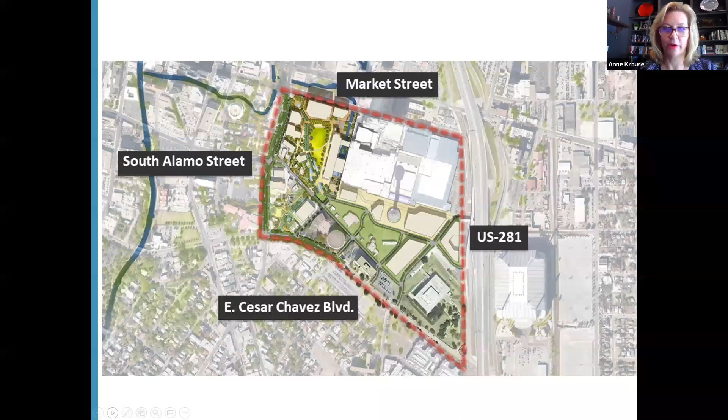So the 40-acre urban parks district that we're creating, called Hemisfair, tipping our hat to the '68 World's Fair theme, we are going to be creating 3 different parks that all have a different personality.

The first one I'm going to tell you about is Yanaguana Garden. The design theme for Yanaguana Garden is play from pre-K to gray, and we're doing a really good job of that. Since opening just about 5 years ago, we've had over 2.7 million visitors come to Yanaguana Garden. It's about a 6-acre footprint and 4 acres of green space, and people really do play there all the time. Of our annual visitors, 84% are locals, of every age, ability level, and zip code. So all of San Antonio is represented, as well as other counties and states, and we lost track of how many foreign countries our visitors have come from. It's truly an international spot, but the best part is it's for us locals.

These are just a couple pictures so you can see people having fun. The park is open 365 days a year from 5 a.m. until midnight to discourage camping, and it's a pretty lively and vibrant spot.

We have a series of public-private partnerships going in, and these are on developable parcels. So this is not on the parkland, but these parcels are adjacent to the park, and they're part of our long-term self-sustainability plan.

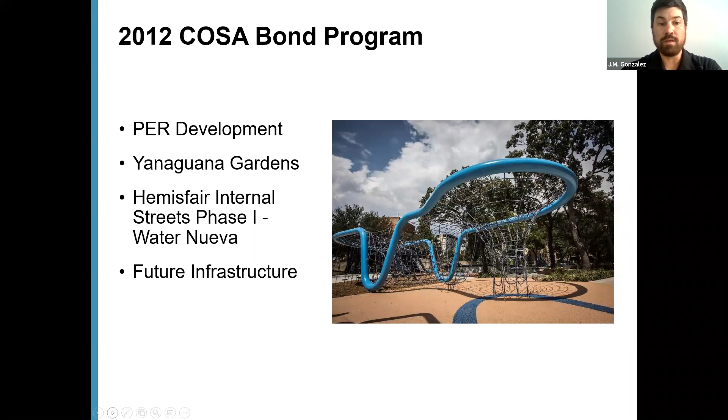When we started looking at the PER, the first thing we looked at was that Hemisfair is right in the heart of the urban center of downtown San Antonio. When we looked a little closer, we saw minimal connectivity between the businesses and the streets out there, so it was apparent that we needed to establish a street grid. That's the first thing we identified as an objective.

We moved on to looking at constraints. If we're going to put in a street grid, we need to make sure it works with the constraints out there. Hemisfair has been around a long time, and there are a lot of stakeholders that have come in, as well as utilities and drainage constraints that needed to be accommodated for.

We then looked at existing and future infrastructure. There's a lot of drainage and a lot of utilities. If we're planning for developments in the future, we want to make sure whatever exists could accommodate it or would have to be improved.

And finally, phasing things out. This was part of the 2012 bond program, and we're now in the second bond, 2017, with another project happening as a result. But it has to be phased, and it's not just about finances—it's also about the constraints and making sure things work in order. Next slide.

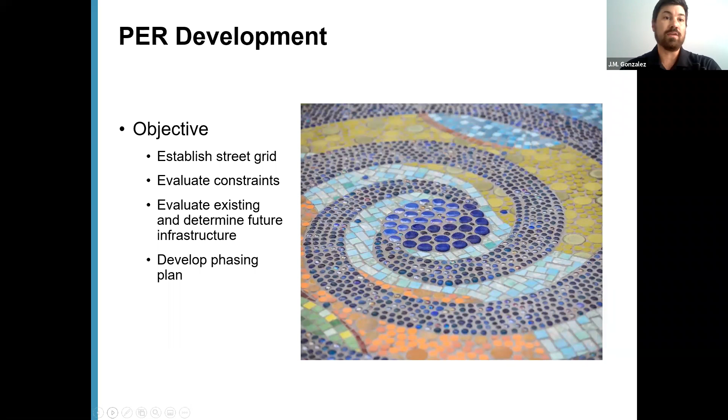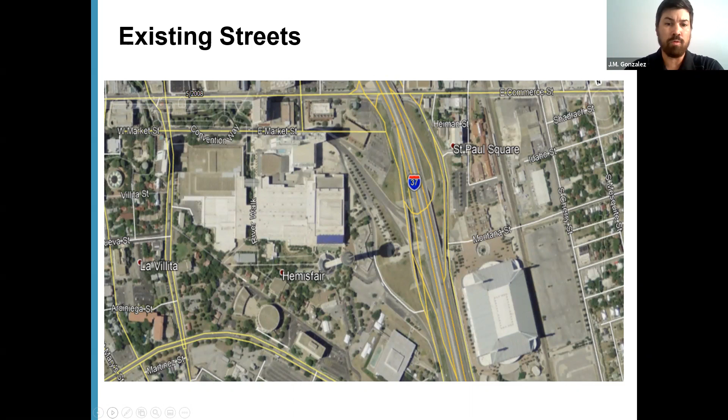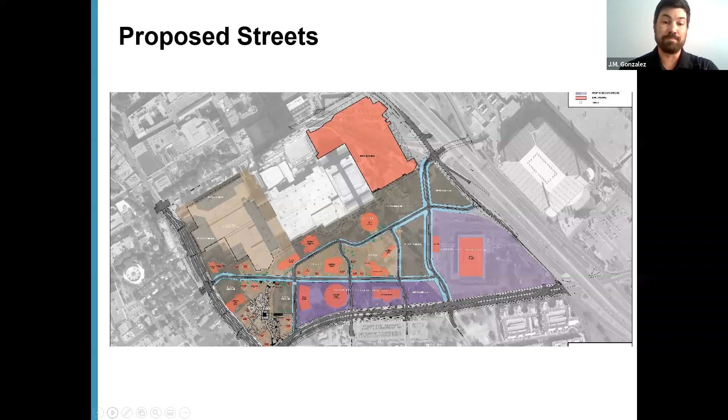So as I mentioned, constraints. Once we put this street grid down, we had to look at a couple of different items that popped up. One was environmental. There were a lot of really old trees, heritage trees, 100-year-old oak trees in place that we didn't want to impact.

So we took the opportunity to realign streets to avoid that. There's actually a really cool slide that Anne will show later where some of those trees were relocated as part of our street project.

As far as the right-of-way, there's a lot of constraints as well. In orange is the Institute of Texan Cultures, operated by the University of Texas. In purple is the federal courthouse and federal property. In green, the northwest side is Civic Park, southwest is Yanaguana Garden area, and in the middle is Tower Park. So all these right-of-way constraints had to be adhered to when laying out the street grid.

From a historic standpoint, there were historic homes brought on site that were being restored. A lot of them are now places of business—I think there's a yoga studio, a couple of little restaurants, pubs, really cool, some offices. But they were still historic homes, and we had to make sure we preserved them and didn't impact them in any way.

Additionally, there was an acequia that ran through the park we had to be aware of. We knew it was there from old maps but didn't know exactly where it was located, so we had to be really careful not to impact it. We actually found it on the first project and had to do mitigation measures for it.

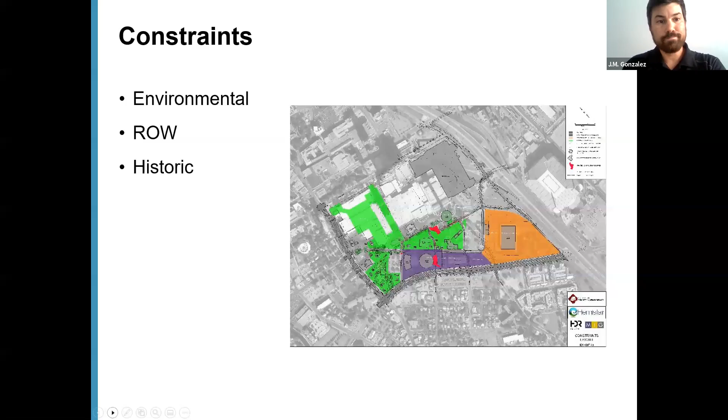Next slide. So this shows the completed street project.

In fact, when we did the engineering for the streets, we used special structural soil that allowed the road to be built while preserving the roots and allowing them to still take in water without being impacted by the pavement.

So again, looking at the infrastructure, what was existing? There were tons of utilities and drainage infrastructure in place, but were they suitable for future development, as well as geotechnical constraints?

So we looked at it from a utility standpoint—you can kind of see the network and grid of utilities out there. It's a spaghetti bowl, they're all over the place.

As far as drainage goes, there was a lot of localized flooding we had to plan for. We're going to build developments, and the last thing we want is for them to be standing in water, so we planned out some drainage improvements.

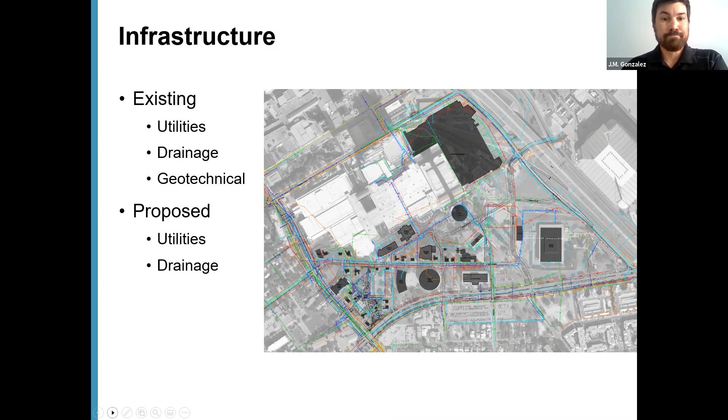They could be anywhere from 3 feet wide to, I think, a 6-foot sanitary sewer line—it's huge. So you want to make sure these things stay in place, we plan around them, and they're adequate to provide services for anything that's going to be developed.

With that said, a lot of these are active lines, so we want to make sure they remained in service until the new lines were brought on board.

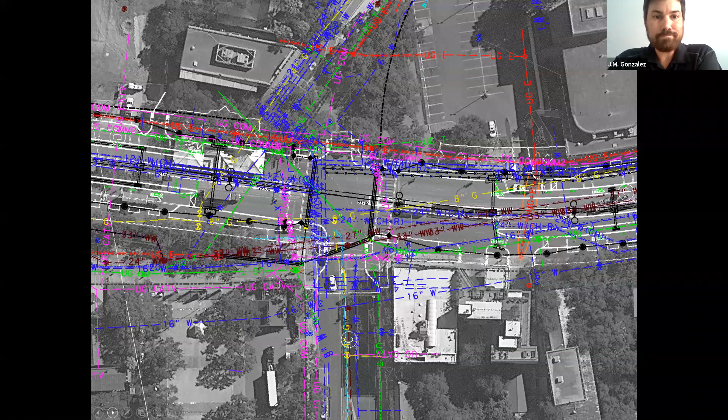As we're building our drainage network, we want to build from the downstream, so that got taken into consideration.

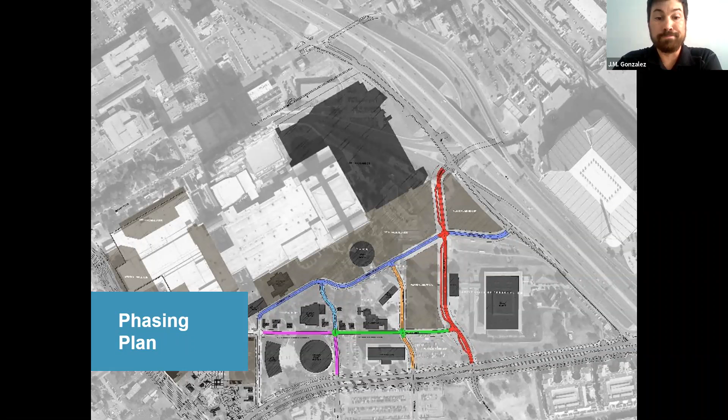So again, Yanaguana Gardens, as Ann mentioned, is a destination location for people of all abilities and all ages. It was a privilege as a transportation engineer—most of my projects are boring, flat roads—to be involved in a project like this. That was a true destination location. It's world-class, it's ever-evolving, and my favorite part, it's interactive. It truly sets the tone for the entire park itself.

And this is the Water & Nueva project. Again, this is the first street project that came out of the PER. I'm kind of kicking myself because I didn't include that in the map as to where the scope of the project was for this, but essentially it is the southwest portion of the project, connected from Alamo Street to the east and to the south over to Chavez.

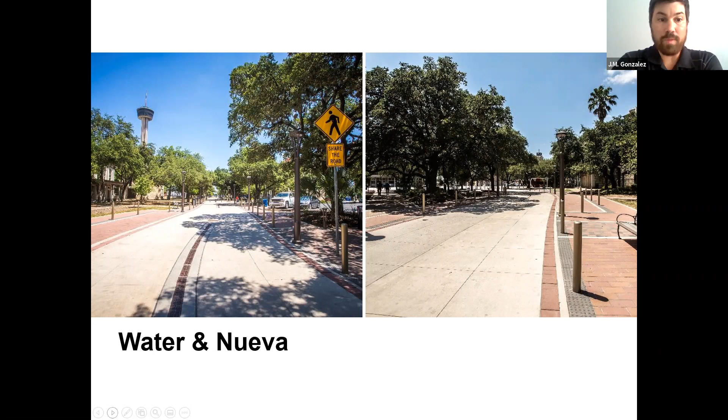But 100% ADA accessible in every single direction. It's low speed, I believe 5 miles an hour. I don't think you have much traffic out there right now. Even before, we have bollards, so they're able to shut down these roads for any types of festival. In fact, when I was going through pictures, one of the pictures I had was from one of the tricentennial events, and they have all these vendors out there. This beautiful site is able to accommodate all the activities that Hemisfair puts in place.

And so what's coming up? Future infrastructure. Right now we are looking at, as part of the 2017 bond program, Hemisfair Phase 2. It's Hemisfair Boulevard, shown there in blue, and this will allow the connectivity from Water Street, which goes south, to IH-37, and will allow that east-west movement across Hemisfair Park. I guess, Ann, if you want to take it from here and tell us what we have more to see in the future for Hemisfair.

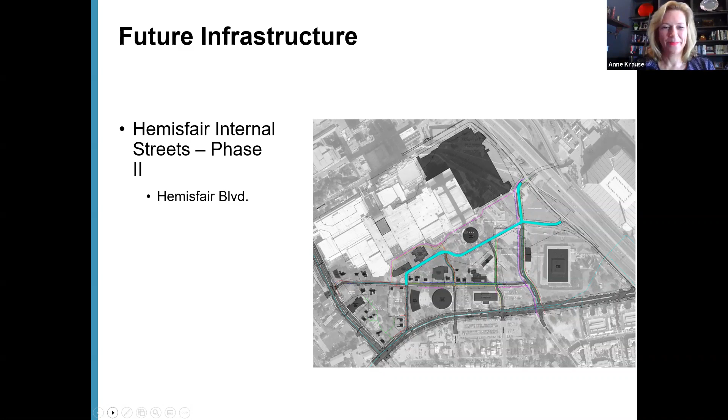Great, thanks JM. So let's look at this map again. So you know about Yanaguana Garden. The next one will be the Civic Park. That will be the flagship park of San Antonio. The parkland alone of Civic Park will be 9 acres. And if the stars align, we hope to begin construction next summer and then open it to the public the following year.

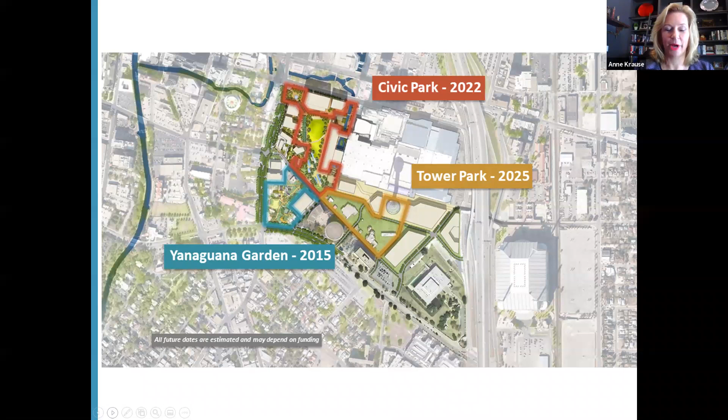So JM mentioned that the western wing of the convention center was deconstructed. That's what was left behind. You can see the famous Hilton Palacio del Rio that was built for the fair, but that is the plot and the site where the Civic Park will be built.

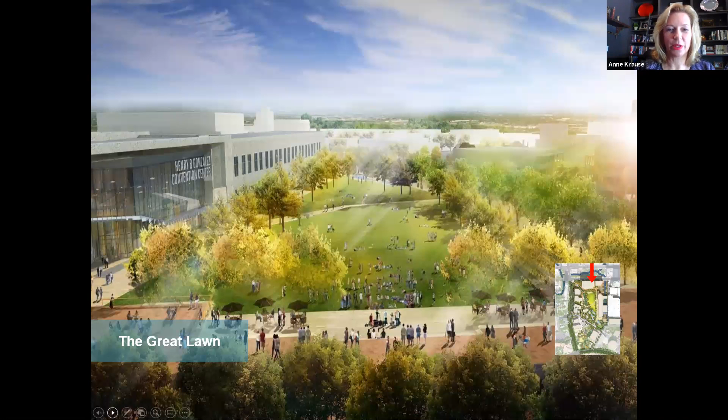Now the next slide will show you what the vision is for that space. This is as if you were at Market Street looking south down toward Yanaguana Garden. Part of the 9 acres will be a 2-acre lawn that can hold 10 to 15,000 people if the Pope comes to visit, or if people want to protest safely, or if Mick Jagger wants to come and give a concert. We have a place to gather.

And that's something that the designers, GGN, found out when they came to do interviews in San Antonio to see what the community wanted. We like to get together, we like to party. COVID's kind of tamping that down for right now, but eventually we'd like to get back to doing that. Think about our fiesta events, we like to gather. And so we're finally going to have a gathering spot. Imagine when the Spurs win their next championship, we'll have somewhere to go.

And then the third park will be Tower Park, and that will be at the base of the iconic structure you see on our skyline that was built for the World's Fair. We've already begun design work on that, and we hope to open it to the public in 2025.

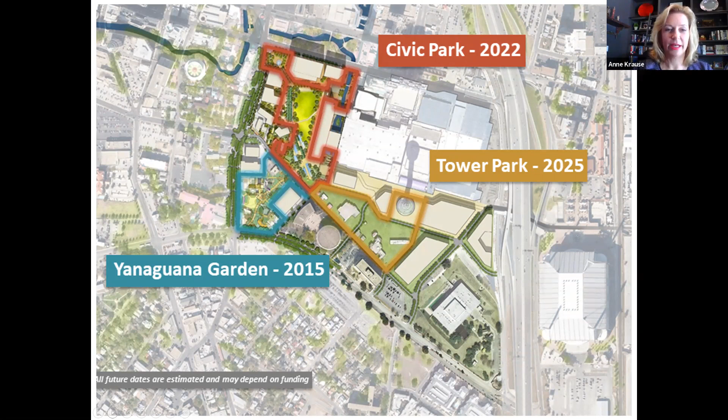So as I mentioned, we get community input when we're doing design. And it's really fun to have different groups that represent all types of San Antonians get together and express what they want to see at their park. That has been a very successful endeavor for us because this is truly a park for the people of San Antonio by the people of San Antonio. It's great to see and hear what they want, what kind of services they want, what kind of businesses they want, the complete streets where pedestrians, cyclists, and cars driving slowly can all share the road. That all comes about because the community says what they want at their park, and we're so pleased we're able to deliver that.

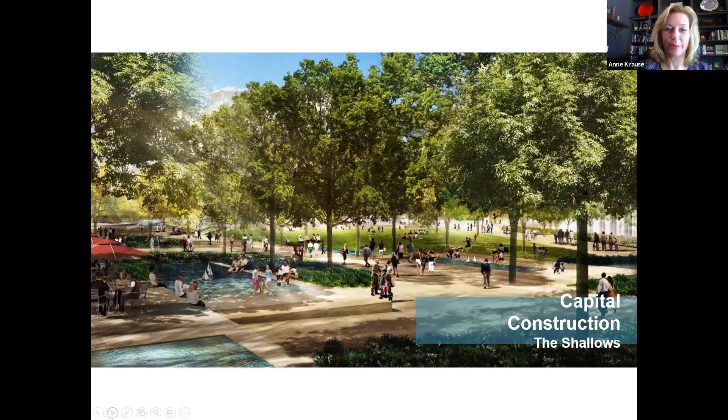The Conservancy raises funds for basically four things, because one of the misnomers out there is that the city pays for everything. While the city has provided generous bond funding, that is not enough to execute a world-class vision, so that's where philanthropy comes in. We raise funds for capital construction.

Next, historic preservation. We have 21 historic structures. Some were built for the fair, but this one was a house built in the 1800s, and someone was actually living there on East Nueva Street. It was called Goliad Road at the time, but they had to leave their home for eminent domain for the fair. During the fair, that house was used as a restaurant. After the fair doors closed, there was no plan, so it fell into decades of neglect. I'm not kidding when I tell you there were squatters and feral cat colonies living there when I came to the team six years ago. As you can see, we've done some exterior stabilization work.

Now we're going to do the interior, and then we'll be able to open a business. They give us a portion of their revenues as their lease payment, which we then reinvest in the park. So it's a really cool virtuous cycle.

Next, as JM mentioned, we have a lot of environmental initiatives at the park. We do pollinator gardens and plant trees, but we also have transplanted trees. This one weighed over 110,000 pounds, and it was truly a feat of philanthropy and engineering. We transplanted 31 huge trees to their future site at Hemisfair, and of the 31, 29 are thriving, which is a really excellent percentage. We're really proud of that. The day Civic Park opens to the public, there will already be shade.

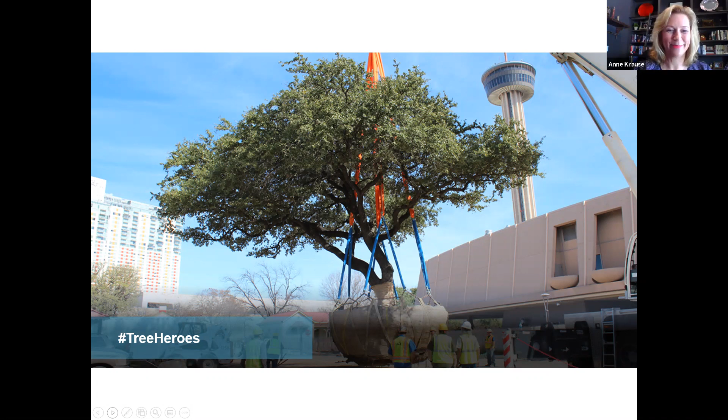Next, the last thing we raise funds for is programming. There's always something going on at the park. Due to COVID, we've had to pivot and do a lot of our programming virtually, but we look forward to the day when we can do in-park programming again. One outcome of the pandemic is that we realized there's a thirst for virtual programming, so we intend to keep that up even once the public health crisis subsides.

I would not be doing my job if I didn't tell you that every contribution makes a huge difference. We have a donor panel wall for people who give one dollar all the way up to millions of dollars, and it's in alphabetical order. We do that because we want San Antonio to know it takes broad community participation to pull off an aspirational vision like Hemisfair's, and everybody's gift matters.

Next, I invite you to come to Hemisfair. My favorite thing to do is get out of my office and into the park and hear children laugh. So consider yourself invited. Give me a shout if you want a personal tour, it would be my pleasure. Thank you so much.

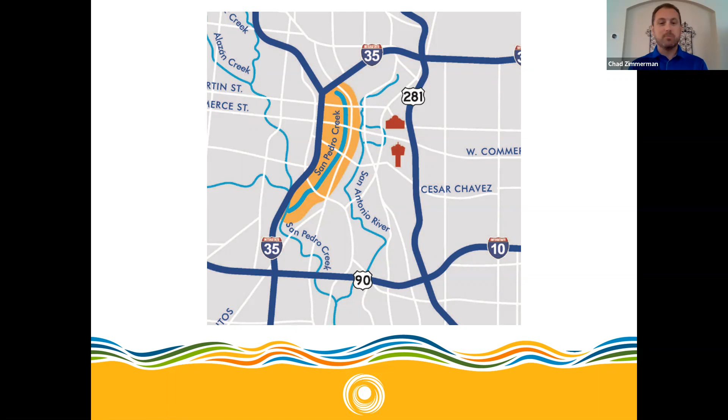So next, there you go. The project phasing of this project was originally programmed to be one continuous project, starting at Santa Rosa Street and going all the way down to Confluence Park, which is at I-35 and Cevallos. But it was broken up, mainly due to the Tricentennial San Antonio.

For those familiar, the 2018 Tricentennial celebration of 300 years of San Antonio. So it was broken up into phase 1.1, 1.2, 1.3, phase 2, phase 3, and phase 4. And also for constructability reasons, it was done this way.

So phase 1.1 goes from Santa Rosa Street, the inlet structure there at I-35. Most of you don't know what the inlet structure is, but we'll get there. And it goes down to Houston Street.

The next phase, 1.2, which is under construction right now, goes from Houston Street to Nueva Street. And then 1.3, which is in design and actually just starting construction, goes from Nueva to Cesar Chavez.

At Cesar Chavez, the creek goes underground into box culverts, then reemerges at the outlet structure, which is at El Paso Street, which is phase 2, and stays above ground all the way to I-35.

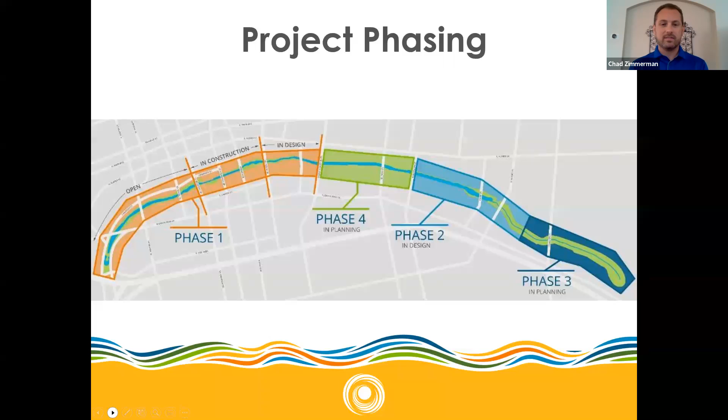So I'll hand it over to Christine right now to explain the other parts of the project and the phases of the project. So, Christine?

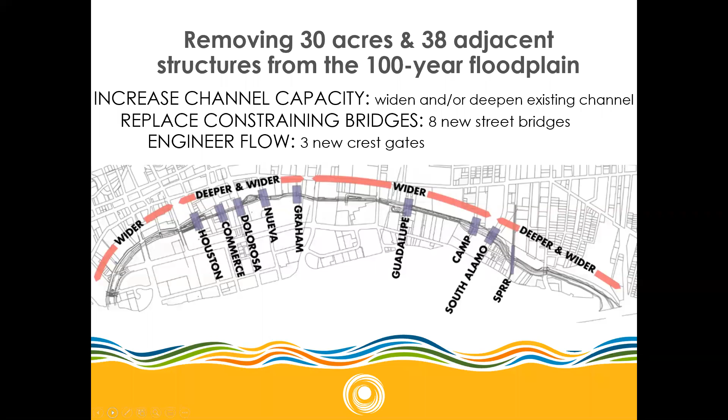Here you can see what the floodplain will look like once all phases of construction are complete. As I mentioned, the ultimate goal is to contain all 100-year flows within the bank. There was also freeboard added so that future flood control projects could bring flows to San Pedro Creek.

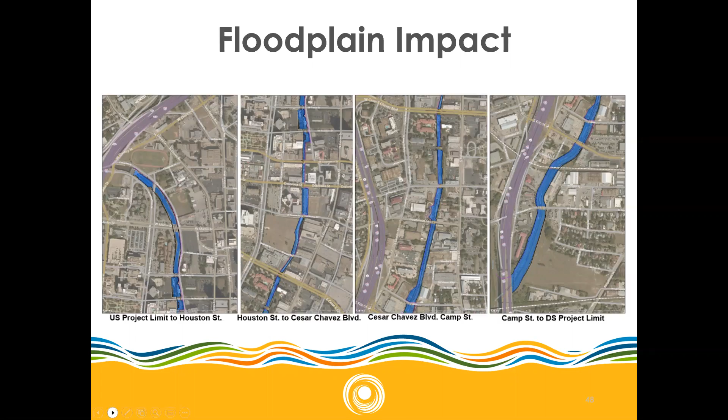Water quality is also a very important component of this project, so we took every opportunity we could to incorporate various features. In the open parts, we have aquatic plantings that remove nutrients from the water, floating islands, and plants behind walls. We also have engineered structures that look almost like manholes with filters inside. They intercept the storm sewers in the streets and flush out large debris before it enters the creek.

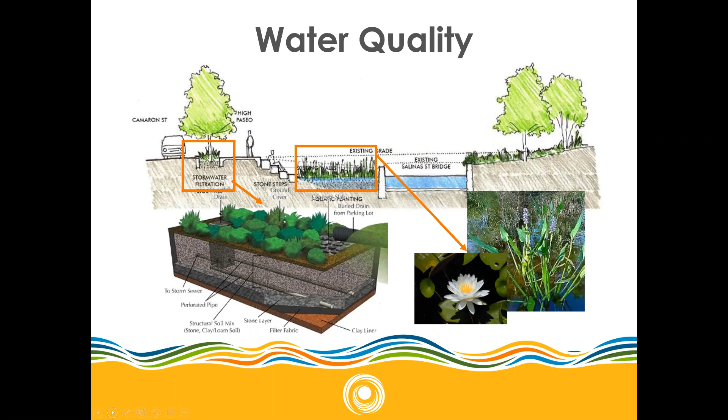In the next phases that will be opening up, we're incorporating new features such as bioretention ponds and bioretention soils. We're taking every opportunity we can to clean the water as much as possible, hoping to revitalize the aquatic environment so we can see more ducks, fish, and turtles, which is pretty cool to see when you go out there.

Culture is another key component. There's such a rich history from San Antonio, even in its 300 years since inception, and San Pedro Creek has played a crucial role in that. Some of the ways we tell this story is through the interpretive signage located throughout the park. You can see them all along the creek in the open part, and we'll continue it in the phases as they open up. They really tell how San Pedro played a role in the history of San Antonio and Bexar County.

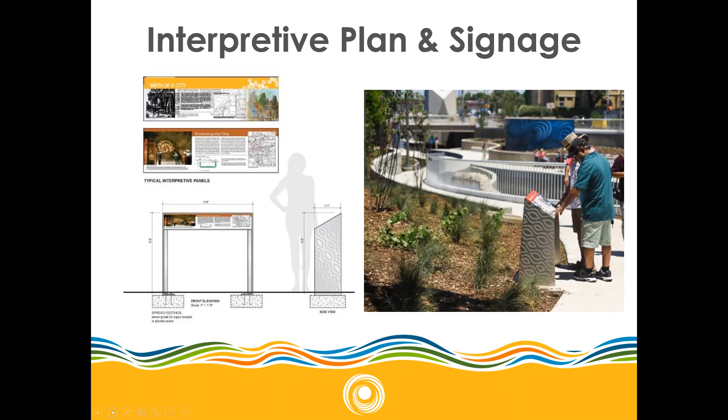Art is another important way we tried to tell the history of San Pedro Creek. We have various media throughout the park, from custom tile artwork to murals, bridge inserts, and word art.

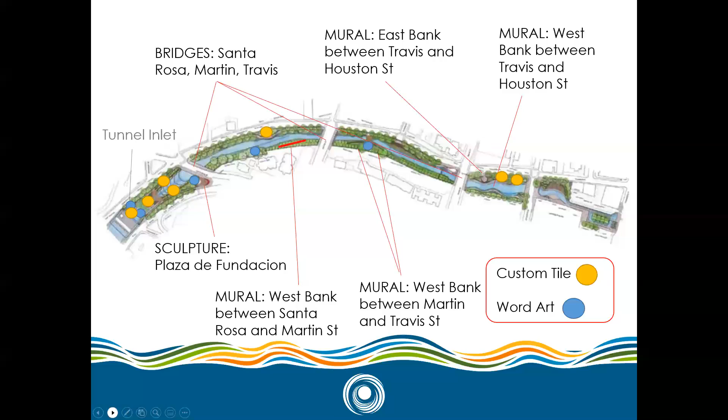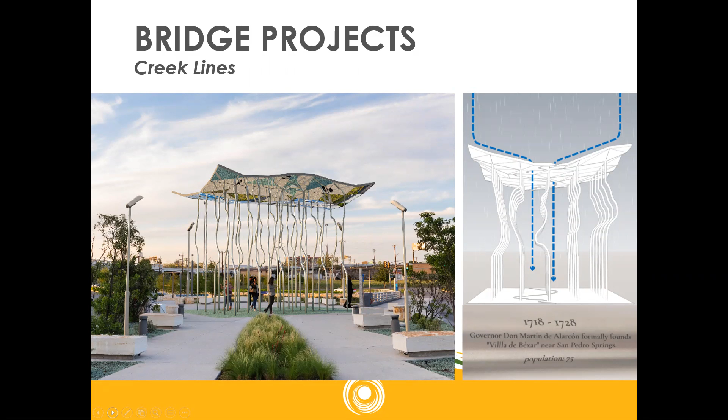Here's one of our art pieces found up at the Plaza de Fundación, just north of Santa Rosa Street. It basically tries to signify the history of San Pedro. There'll be historic text inscribed on the poles, and when the light hits it just right, it'll cast a shadow on the ground that looks like San Pedro Creek as it was naturally.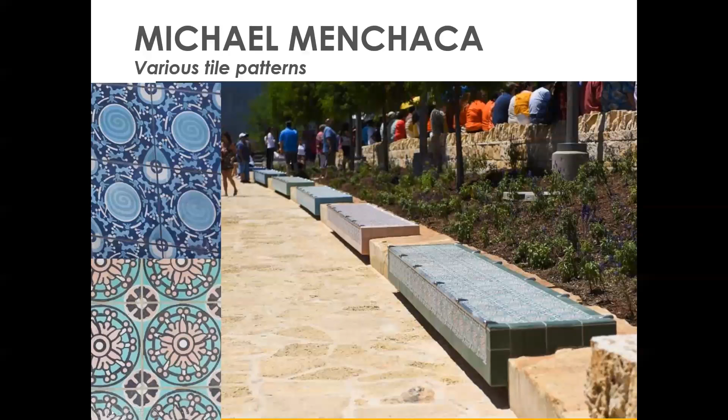Another artist we brought on board did a lot of the custom tile work shown here in the picture, the 12 generation benches. They're supposed to signify the 12 generations that have come and gone throughout the 300-year history of San Antonio. You also see a lot of his tile art throughout the open segment of the park.

We also have word art done by John Philip Santos. He uses various poetic and historical texts to again tell the history and really engage and inform the public of everything that has gone along San Pedro Creek.

In the current segment of San Pedro Creek that is nearing completion, phase 1.2 will have an interactive water wall, which is a feat in and of itself to make happen. It's a little over 250-foot long water wall, which is supposed to be interactive. It's really all about engaging the community. Much like we heard from Hemisfair with the chimes and the drums, it's really important to make this a fun space for the community, so we wanted to engage them through this interactive water wall.

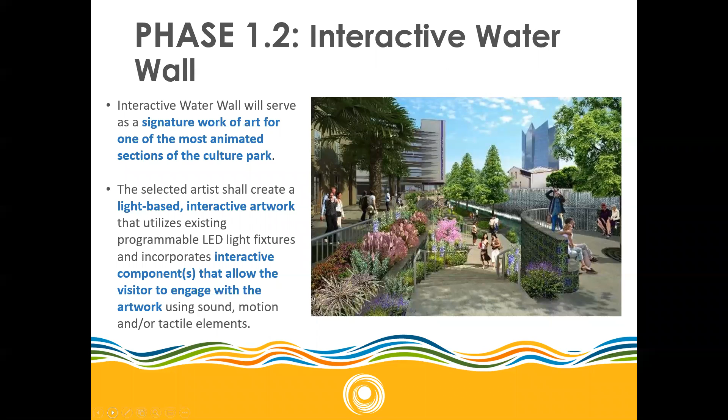We brought on an artist, Adam Frank, to help design the artistic elements of this feature. There's going to be a 50s-style microphone sculpture in the park, and across from it, along the water wall, there'll be LED lights. The public can come up to the microphone, talk, sing, or play music, and as the microphone picks up the sound, the LED lights and the water wall behind will change and move in accordance with the sound. So you'll see in real time how your sound is changing the wall, which is pretty cool. We've had some trial runs, and it looks really great. We're excited about that.

Also in the stretch between Commerce and Dolorosa, we're going to have even more murals. This will be a set of 5 murals meant to tell the civil history of San Antonio, from the Presidio and the Spanish Governor's Palace to the Alamo and all the rich history of San Antonio. We're in the process right now of designing those.

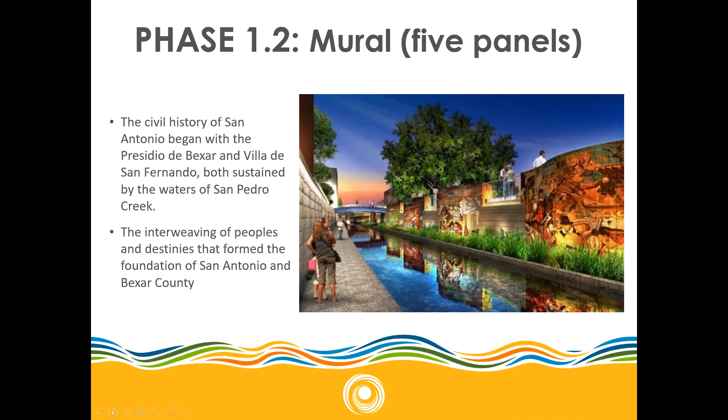Here I'll pass it over to Chad to talk a little more about some of the improvements that have gone on along San Pedro Creek. Thank you, Christine, appreciate that overview of the art and everything going on with San Pedro. That's really very exciting for everybody involved with the project, and we're hoping everybody will appreciate that art and what's been going on there.

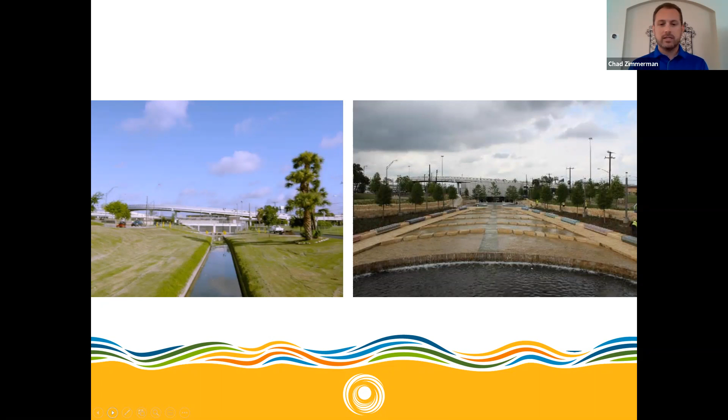I wanted to show you some before and after pictures. This picture is what I was talking about earlier, the inlet structure—you can see it on the left-hand side, in the background, right below I-35. This is the structure of the Plaza de Fundación, which Christine talked about earlier. This is the view of it with the 12 generation benches, showing the interactive piece of water here.

You might look at these pictures and ask how we got water in there, considering there was no water in the channel originally. As Christine hinted earlier, there are 3 hydraulic crest gates included with the project, which basically create the artificial water stacking that you see, and activate the space culturally and biologically—it really helps everything. Without those gates, you would just get a trickle of water when it was raining or something like that.

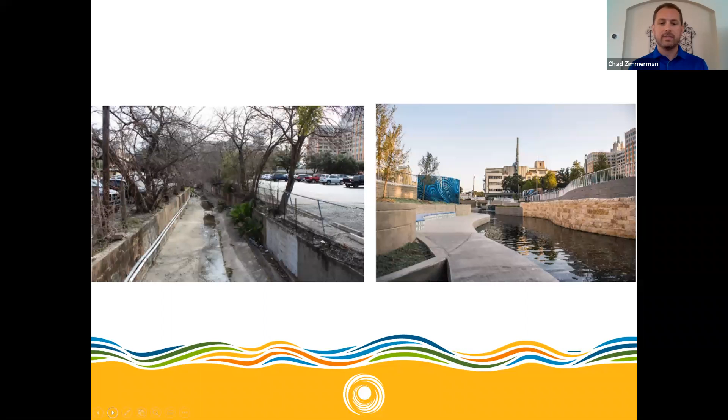Another picture highlights that this was a forgotten area of San Antonio, just a little drainage ditch. As a lot of native San Antonians know, San Pedro Springs was feeding this at one time, and it was lush and rich—that's why San Antonio was such an attractive area, and this area was attractive. But once those springs stopped flowing and San Pedro Creek stopped flowing, it was kind of forgotten. So we're trying to activate this space again.

These are views showing the Salinas. You can barely see it in the picture on the left-hand side, but it was the Salinas Bridge, and to honor that, we put a boardwalk there. That's where SARA has a lot of their yoga-at-the-park classes right now—obviously social distancing is practiced with those now.

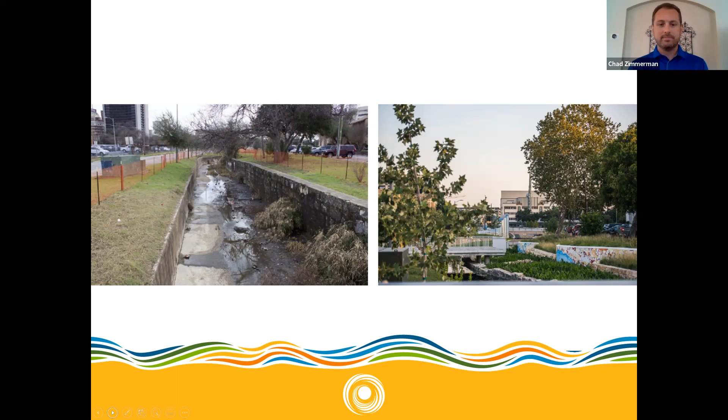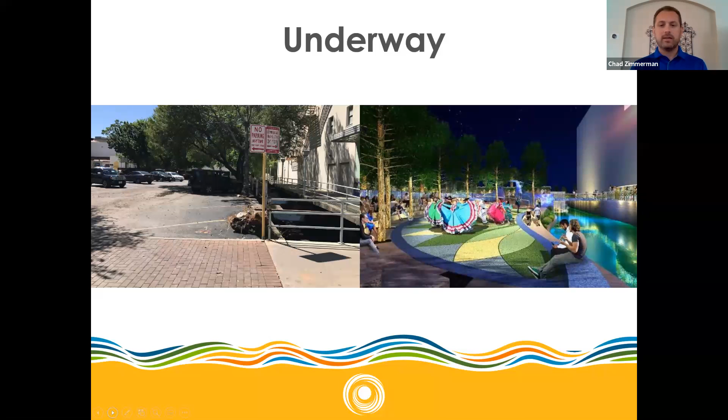This is phase 1.2 I was talking about. This was originally the Acosa parking lot, and now it will be Alameda Plaza. The building on the right-hand side is the Alameda Theater, so this space will be named Alameda Plaza, a place where people can gather. It'll have some amphitheater-style seating, and there can be shows there, whatever it may be. In the background on the picture on the right, you can see the water wall that Christine talked about.

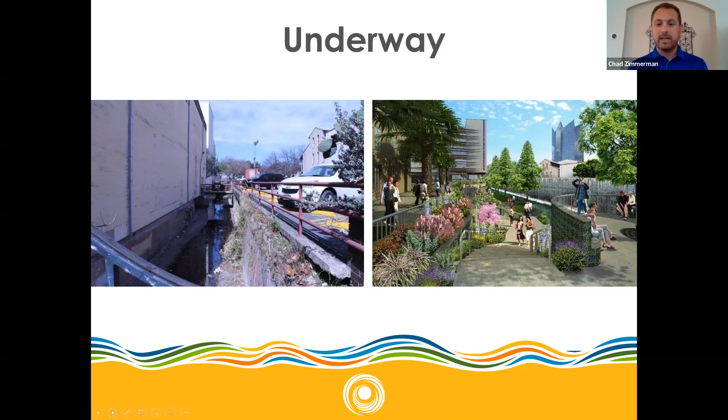Another neat feature of the water wall is that when people are not speaking, singing, or playing into the microphone that Adam Frank's designing, it will be playing the live feed from the TPR, so the water wall and lights will activate with that feed.

This is just showing the murals that Christine was talking about. You can see that this area was pretty barren before, so we're really just trying to get a space where people can walk and interact with the water and also with the culture of San Antonio.

As you saw in the pictures, there are a lot of buildings around this area. As a structural guy, it was a very complicated project, working up next to buildings and designing retaining walls next to them. It was quite an exciting project, and also, definitely as a structural engineer, very nerve-wracking.

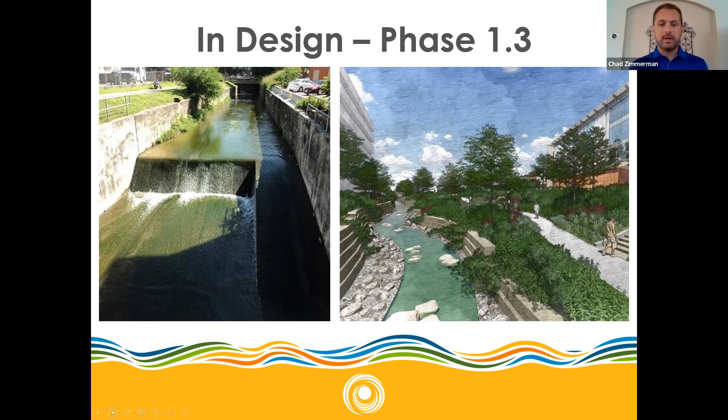This is past El Paso Street, actually Guadalupe Street, and this is phase 2. This is where the project becomes a little more natural, a little less urban. There's not as many closely spaced buildings. There's going to be a path, a place where people can interact with the water, those type of things.

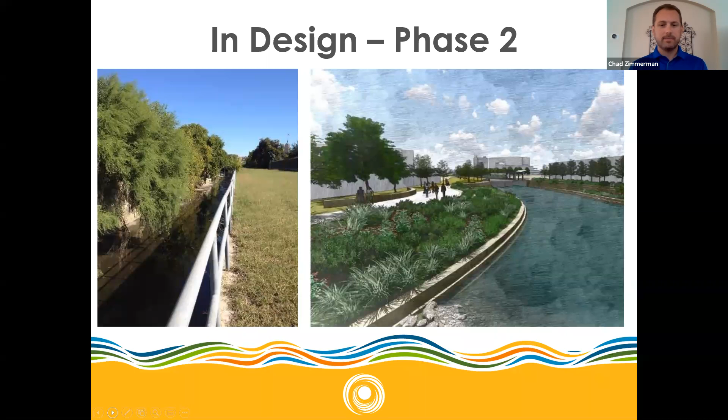This is a neat feature we struggled with a bit at the beginning. The picture on the left is an existing culvert where the railroad used to be. We're keeping the existing culvert, adding on to it and creating a kind of plaza for San Pedro, a mini park along the stretch. We'll have a shade structure, an overlook with a wood deck, and some nice plantings where people can rest. SARA also has plans for some programs in that area.

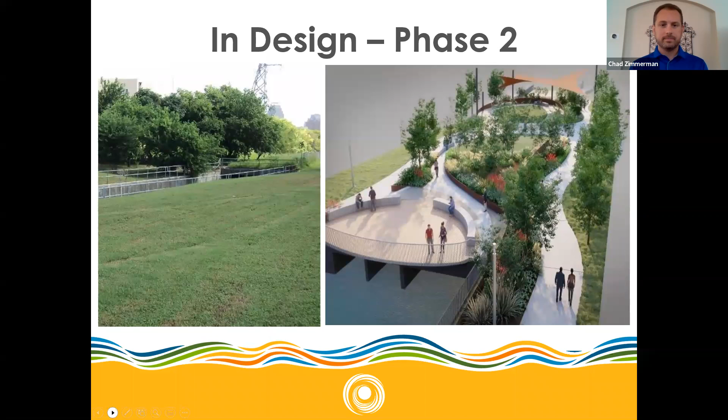I mentioned earlier phase 4. Phase 4 is where the culverts go below ground, or where the creek goes below ground. You can see that view at Cesar Chavez looking downstream, whereas before we were looking upstream. Basically you don't see anything because everything's below ground at that point.

This rendering on the right-hand side is actually an older rendering. We've come to the conclusion that we're not going to open those sections up, as budgetary constraints and other regulatory constraints have basically prohibited us from doing this. So we're actually going to do just an above-ground trail with lots of trees and benches—it'll be more like a park through this area.

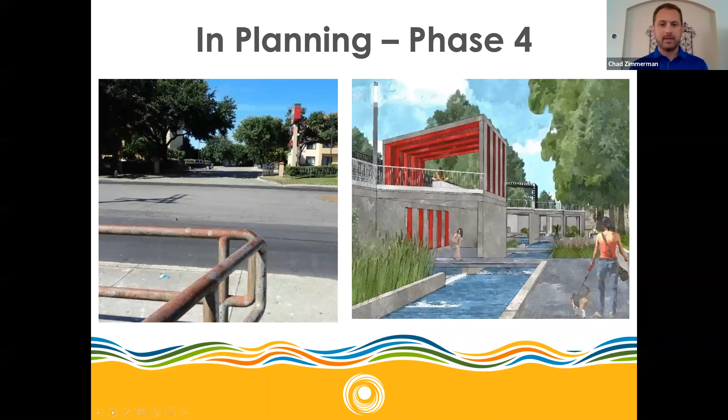Everybody likes this—the economic impacts of this project, studies that Bexar County and SARA have done. The total cost of the project is $175 million across phases 1 through 4. The total potential return for this project could be $1.5 billion. If people have been down there, I think they've already seen the amount of improvements going on along the creek.

The Soapworks apartments have actually come under new management, and things have improved, really upgraded there. Some of the other areas—Frost Tower is now close to the project, and the federal courthouse as well, which I'll talk about a little bit.

So new development, this is what I was getting at here. The SAISD headquarters is actually going in at the head of the project up there by Santa Rosa Street off of Cameron, and that one's coming along nicely. I think they're getting close to at least the exterior of the building completing. So if you have a chance, you can drive down there and see the SAISD headquarters building.